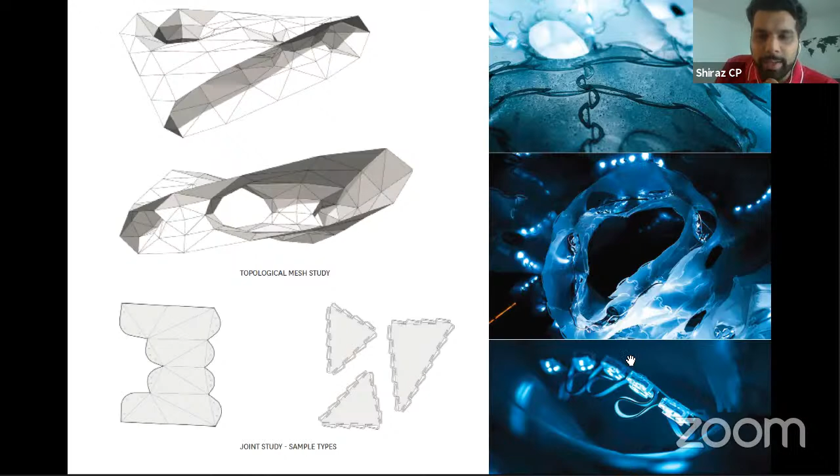If you see on the right hand side, you could see how the LED light strips are embedded. This is a basic concept section—there are two layers, an internal layer and an external layer, and the inside void is where the aluminum strips and the LED light strips run. You could also see a small node section here. This is the basic principle of the whole form.

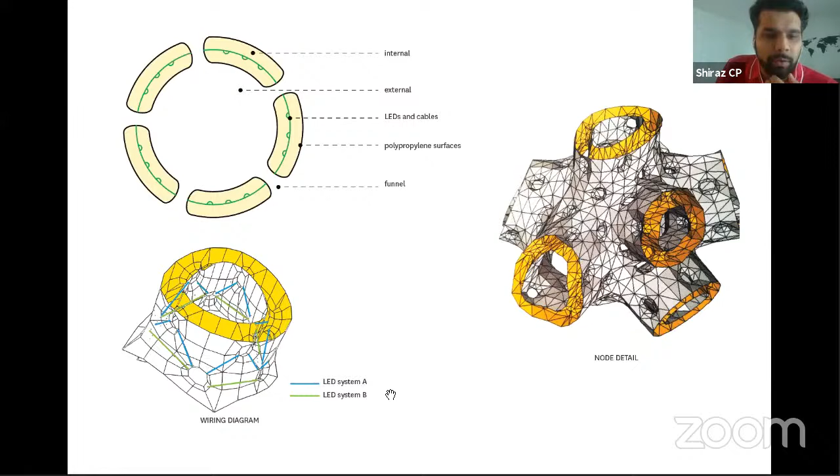We also used two types of LED systems. At the end, this was the whole form set up on an urban plaza. It was well received by the public and the media. It was more like an interaction, because along with the light, there was also smoke emitted using equipment. Overall, it was a very intriguing and fantastic effect for the public. A video of this would be played at the end.

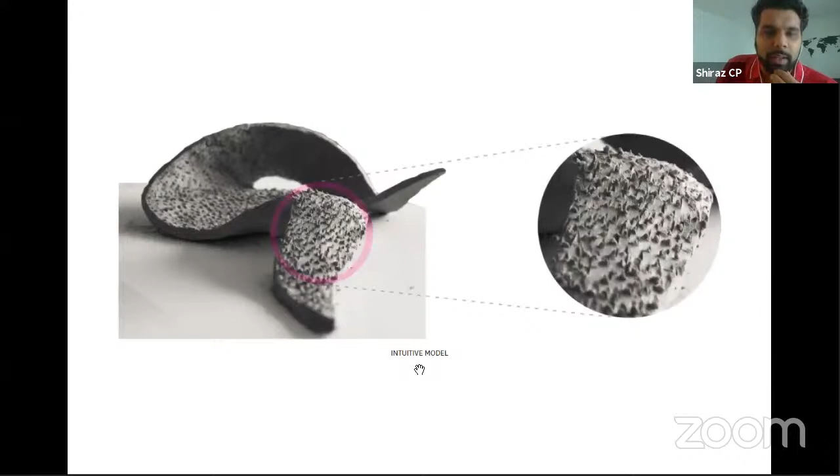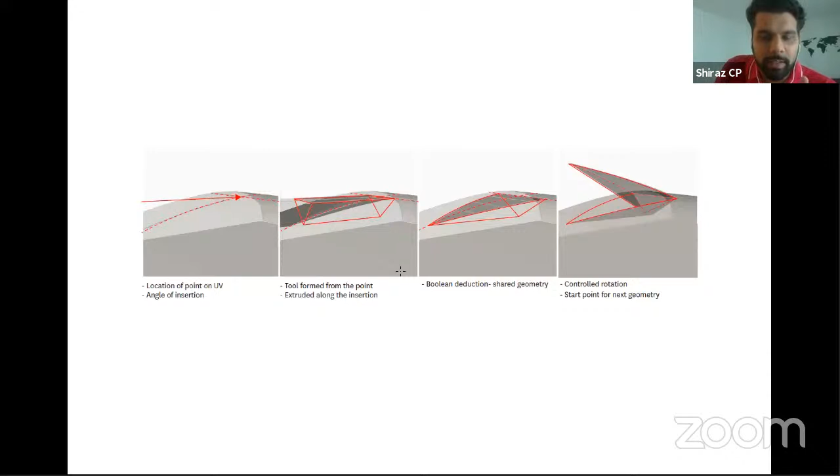Another small university project I'd like to share is what I call field manipulation. Basically, we were given a random task to quickly make a clay model in half an hour, and the tutors told me the patterning effect was something unique in what I had done. We were asked to digitize these special features, so this is the digitization process in Rhino showing how this patterning effect came about.

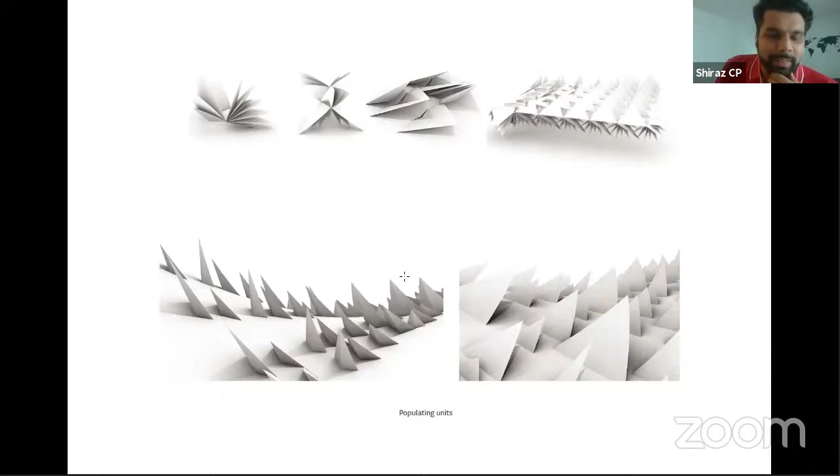This was taken into Grasshopper and multiplied to see what other effects we could bring with the patterning. Later, this effect or tooling mechanism was again applied on the clay model to explore the various effects it could produce.

And this same principle was applied on a few primitive solids. These primitive solids, if you see, have wonderful effects. It's more a non-linear approach, I would say. And each solid has some or the other spatial potential.

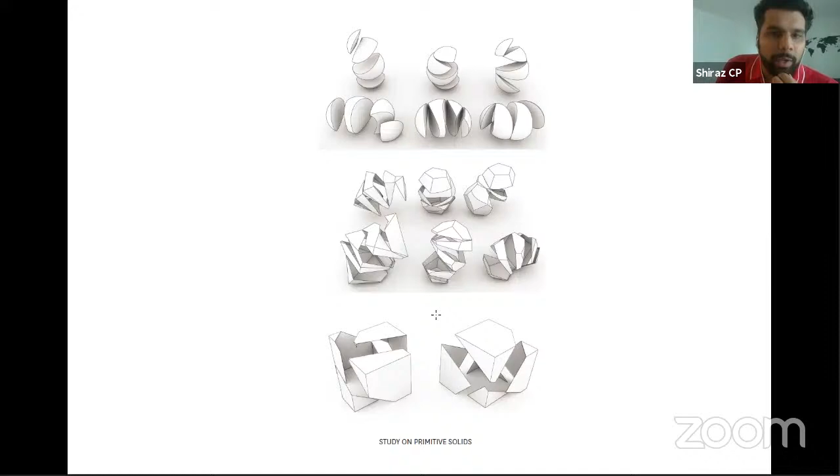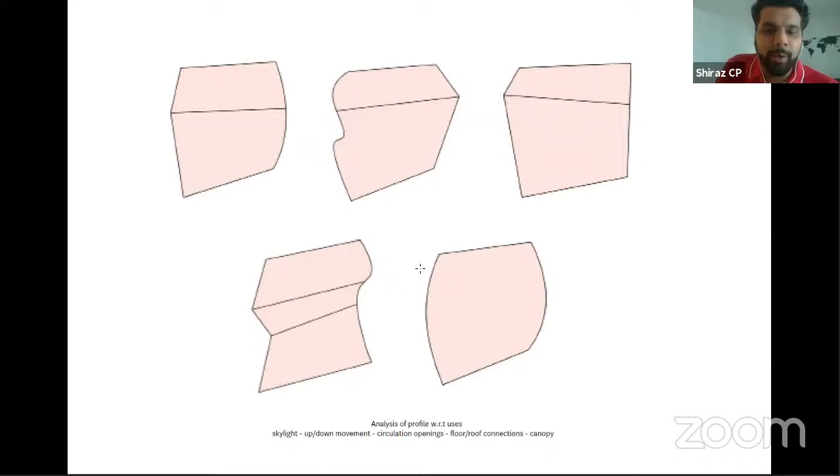At the end of this research, I kind of conclude that my tool is more like sectioning profiles. So we could embed certain kinds of sectioning profiles, and it could be used for skylight, up/down movement, circulation openings, floor and roof connections, or a canopy.

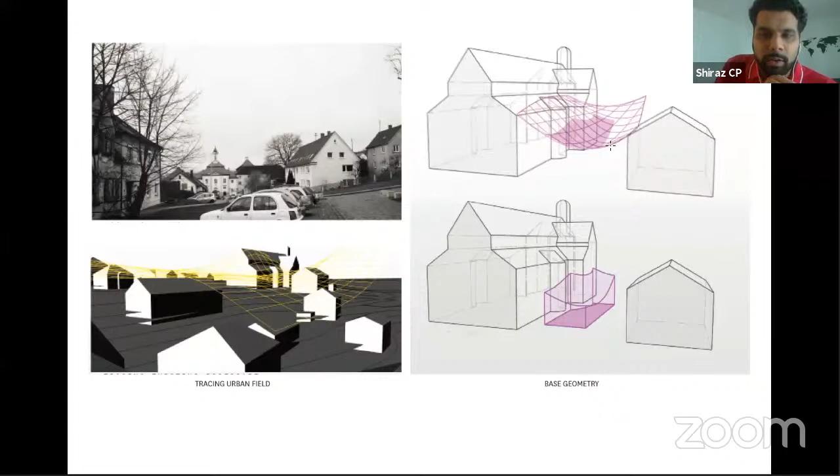So this small project was about embedding these principles onto a site. Basically, this is a site, a topography, and I was quite intrigued by the urban field, so I traced the urban field using a mesh surface. Between the site, there is a part mesh which is mapped, and a base geometry was formed. Later on, I applied my tooling techniques considering the small spatial requirements.

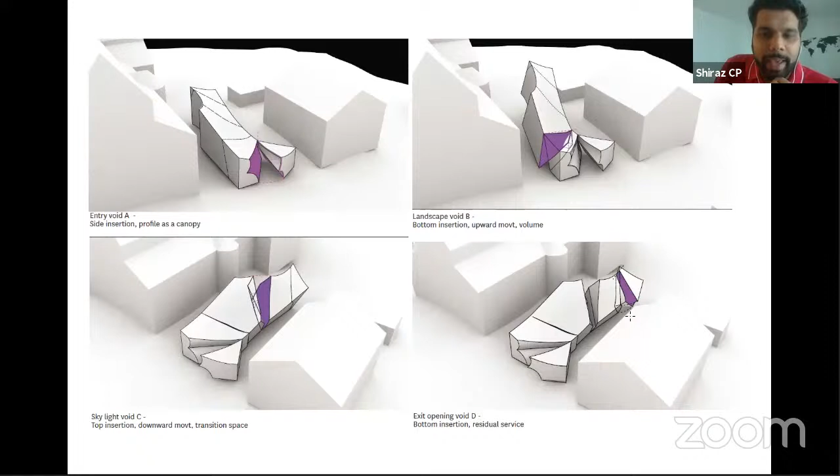Initially they needed a small ticketing counter and a small gallery space, and the gallery space was divided into two. So I used these tooling insertions, one at the side, one at the bottom, and one at the top. The whole mass is deformed, giving an upward and downward movement, also connection to outside and towards inside. At the end, they come out with the last insertion at the bottom.

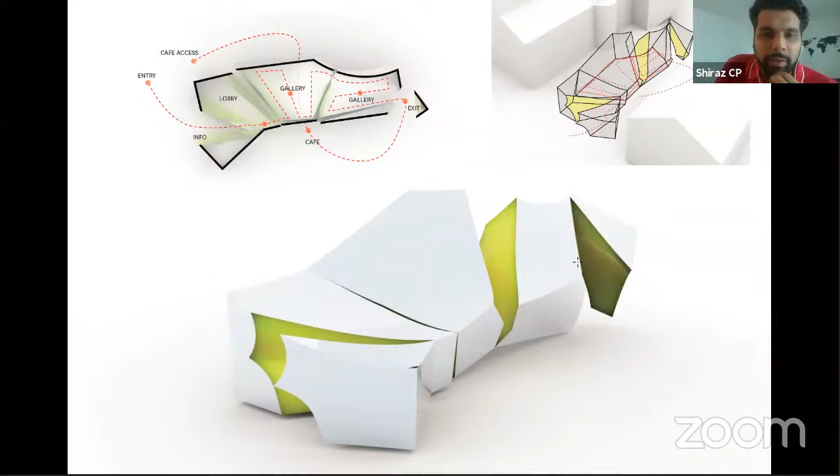If you see, it's basic simple spaces: entry, a lobby, two types of gallery, and exit. Because there is an upward movement, it creates a kind of gallery space and a cafeteria space below. So this is a very intriguing, non-linear approach, something we took from non-linear thinking.

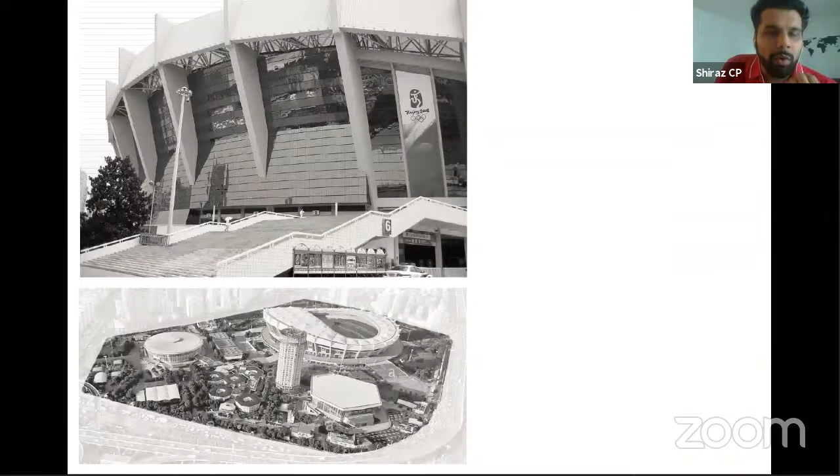Coming to the work part, I will show a small, simple competition we attempted in Shanghai. It's a renovation of a stadium. The stadium was very banal, very boring, as you could see. There is no feel to it, no language to it.

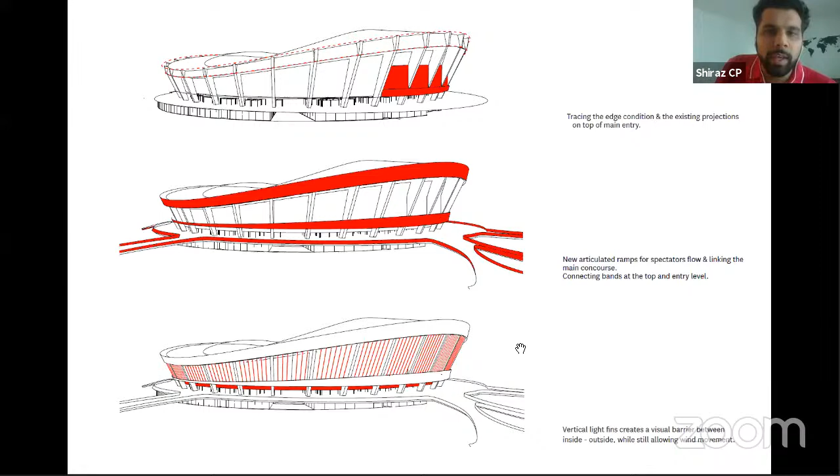So this is my approach, I would say - very simple, very clean, trying to address the issues and have an elegant response. And these are the additions we had done: a small addition on the gym building, the main stadium, and the whole plaza and ramps.

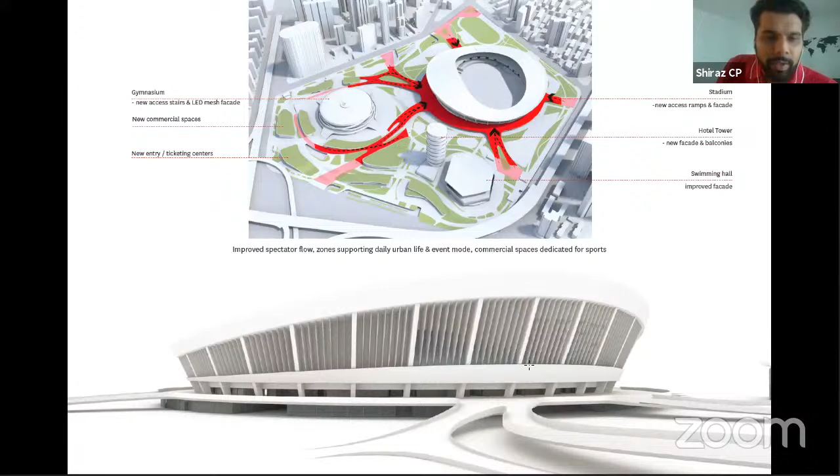This is a conceptual sketch or conceptual render - a very clean, simple form which is tuned up from the previous one. For the gym building, it was a very banal cylindrical block, so we attempted to introduce a sculptural staircase to it.

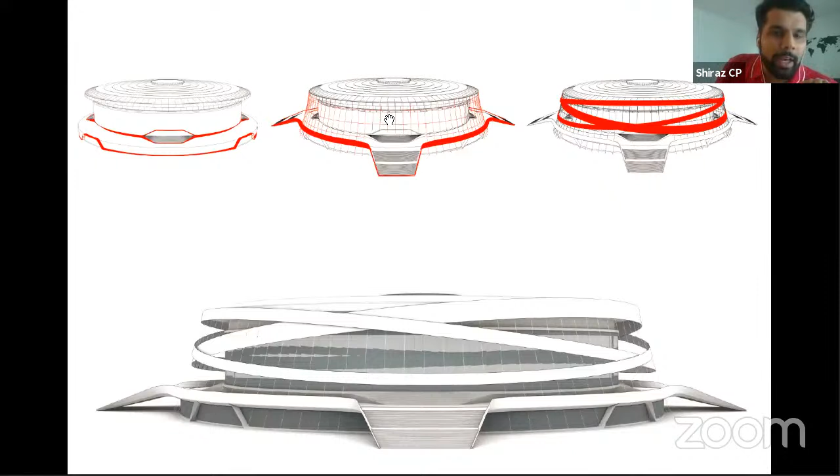The client also needed an LED strip, an LED display, so we tried to loop an LED spiral on top of this building with post-tension cables. You will see a basic schematic section for it.

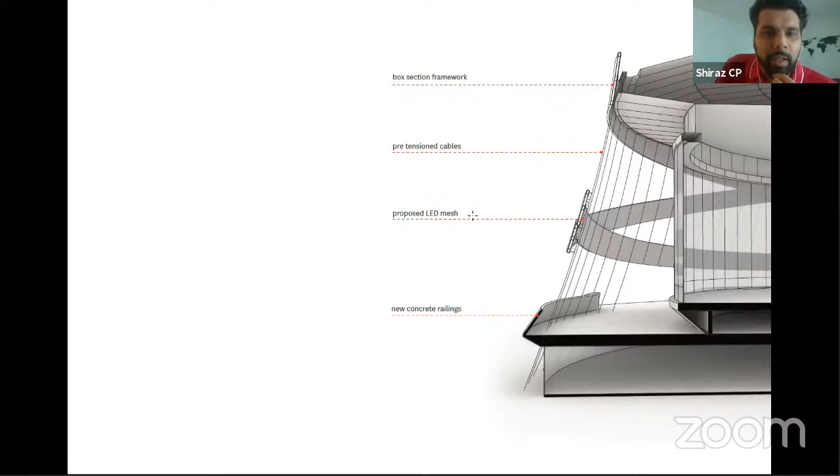At the end, we were almost in a win-win situation, but due to a few financial things, we got second place in this international competition. This is the end product - we have the complete linkage of the urban plaza, and the whole event space is enhanced.

The second topic is about timber structures. Timber as a material is really growing in the European as well as the American market - it's very sustainable. A lot of big renowned firms are trying to experiment with timber structures, so we also had the opportunity to try out timber structures in an office and a hotel project.

In one project, you could see it's more like X bracing - the structure uses X bracing, and more like a hexagon. I was happy to crack some nice hexagonal niche balconies. In the second project, on the right hand side, you could see it's a hotel, more like an Adidas symbol, a tilted Adidas logo, you can say.

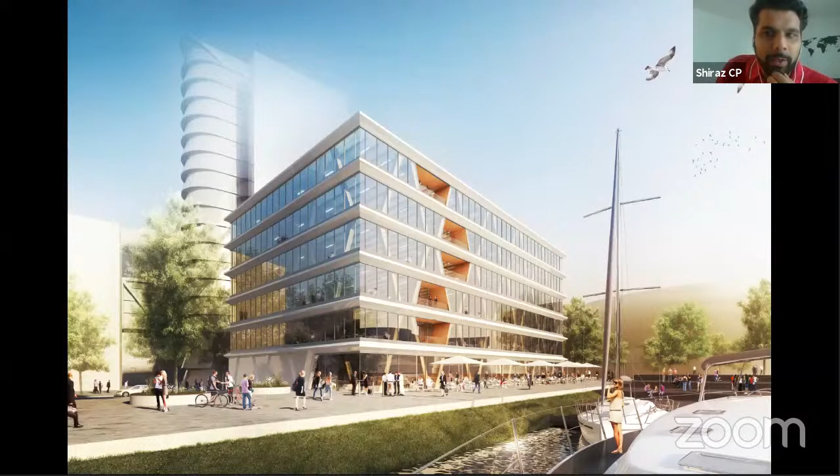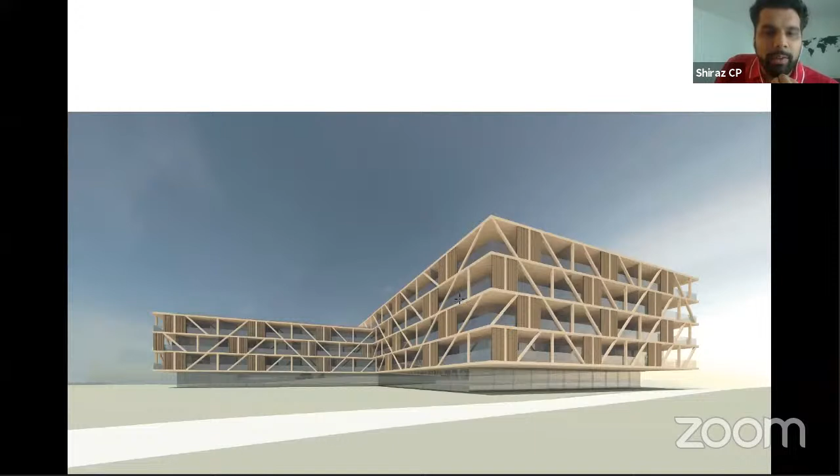This is another attempt for the hotel which we tried. It's basically that pattern - you can see a pattern embedded into the horizontal and vertical structures, like a diagonal pattern, which gives a totally new look to the building.

Another topic is the grids, which I'd like to touch on. Germany is quite conservative, I would say, so we have very little scope to play around. We only have some scope to play with facades, and that's minimal too - we cannot have too much projection, and there's also budget. So we try to do the best within these constraints.

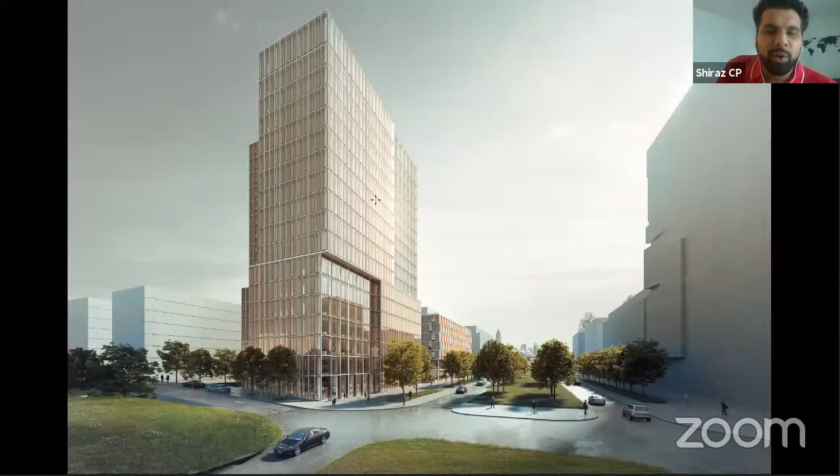So here I have two finished projects coming up. This first one had a volume that was too massive, so we tried a minor interplay of volumes - subtraction and addition, a push and pull. You can see in the middle there's a split, and the whole volume is kind of shifted, which breaks the massive volume. With the facade modules, we tried bigger and smaller modules to create an interplay with the elevation, and even this recess indirectly depicts the entry to the building, splitting the whole volume into smaller volumes.

This is another attempt where we had a huge restriction to sync with the surrounding - a very strong, rigid German raster grid, I'd say. Here we tried to embed a minor gradient effect into the building. The whole facade's glass panels come out as it goes up, so the translucency of the structure increases as it rises.

This is one of the finished projects, same grid system - a finished project in Frankfurt for Deutsche Bank. Here the grids are split into modules, and within the modules we embedded minor deflections. At the end of the day, this beautiful, crystalline structure is more like a showstopper for the street - everyone slows down and has a look. It was a highly acclaimed project by KSP Frankfurt.

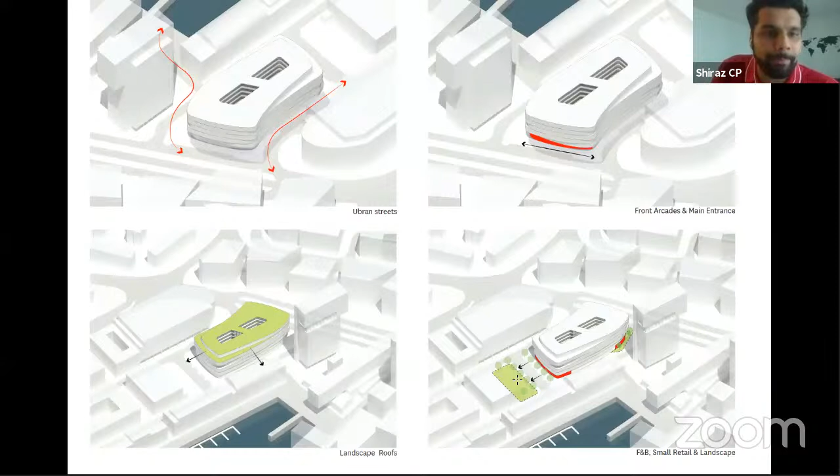As per urban bylaws, we had to introduce an arcade at the front, and we also introduced roof green landscapes at the top so people could have a better view outside. We tried to introduce small retail and F&B office spaces at the bottom, looking out to the greenery. At the end of the day, the result was this - we were very happy and glad.

So we had vertical metal fins, and we also played with the floor slabs - a mild interplay with the floor slabs. If you look closely, these mild interplays also indirectly emphasize the entry.

So there is a main entry and a secondary entry. It's kind of a very harmonious, very gentle play with a rich look to it. On the other side, we also introduced a mild gradient opening for the bottom facade, so the retail and entry is emphasized.

This is another project we tried in East Europe. What you see is a proposal from another architect, and the city was not happy - they didn't agree with the client to go ahead with this. They told it's too boring, it doesn't go ahead. We want something which syncs with the surrounding and a bit more harmonious.

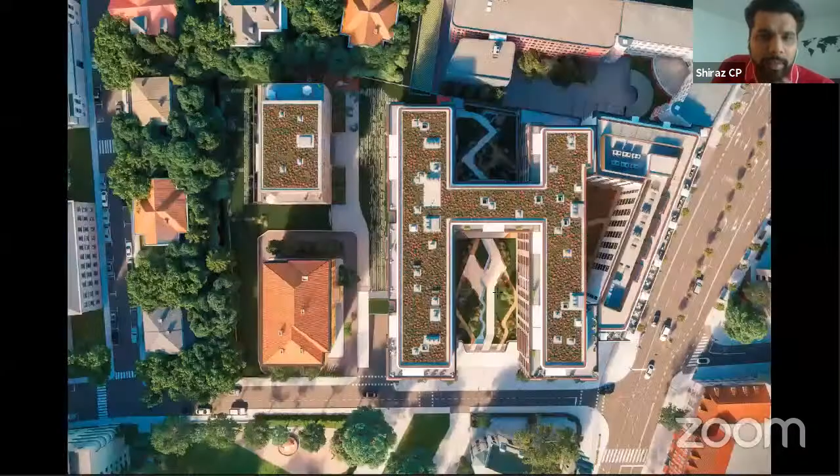It was also quite tough to attend to this because we had two forms, two volumes embedded. We have this L form you could see in this aerial view, and the H form. The L form earlier was an office building which was converted by us into a hotel building, and the H form is a housing project.

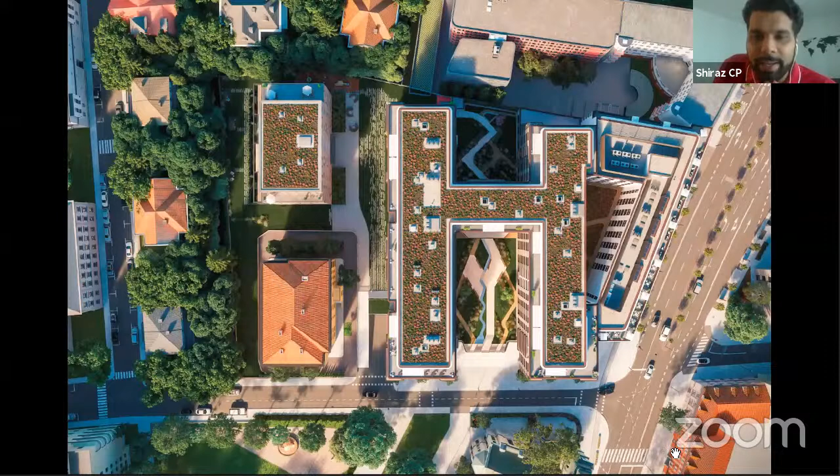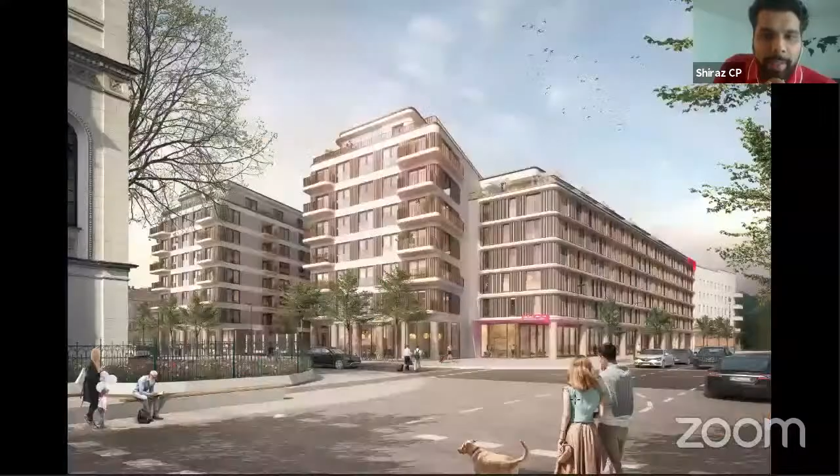What we tried is this corner at the edge was quite tough, and we cannot make it too complex because there were a few historical buildings on the side, and the city wanted a structure or language which kind of syncs with the whole surrounding, but yet something modern and new. After a lot of tryouts, we came out with this result.

In the front you could see there is a hotel project for Marriott, and at the side there are luxury apartments. We had tried to fuse these whole volumes with a minor curvature which kind of calmly blends in, and we also introduced horizontal white lines and vertical terracotta fins.

So you could see there is a minor interplay of the rooms. There are double windows and single windows for the rooms, and emphasized entry for the porch area, also for the arcade retail space.

The whole city, the mayor and the client was very happy with it, and I also believe it truly syncs. It's not too dominant, it's kind of subtle, and it has its own elegance.

I strongly suggest you guys pick up a few modeling techniques and diagrammatic techniques. Basically modeling techniques like the laser cutting machine, the 3D print, the thermocol hot wire cutter - it's highly used in our practice, and it's very important to develop the designs.

Adobe tools like InDesign and Illustrator are very important for the diagrammatic quality, and the diagrams are very important to present here in the European market.